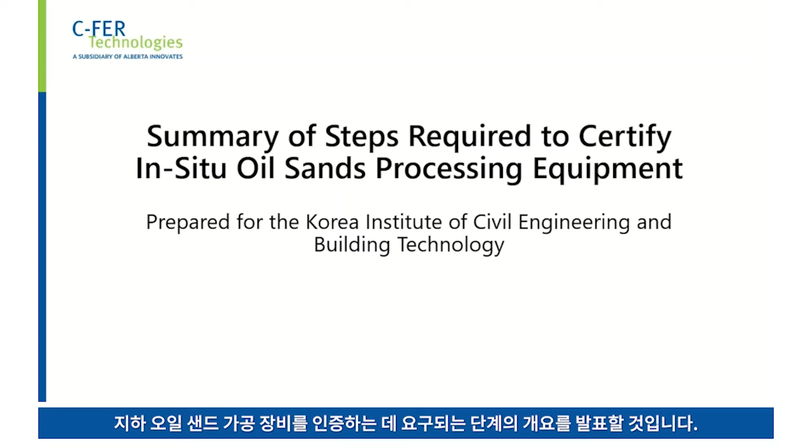I will be presenting on the summary of steps required to certify in-situ oil sands processing equipment, which was prepared for the Korea Institute of Civil Engineering and Building Technology.

First, I will provide an overview of the project, its objectives, and the Alberta Oil Sands. I will then highlight commercial in-situ recovery processes utilized, as well as the commercial steam generation equipment and its associated challenges. We will then explore emerging steam generation technologies, as well as the methods used to process and recycle produced water. We will then examine well pad separation equipment and equipment certification processes, followed by the project conclusion and question period.

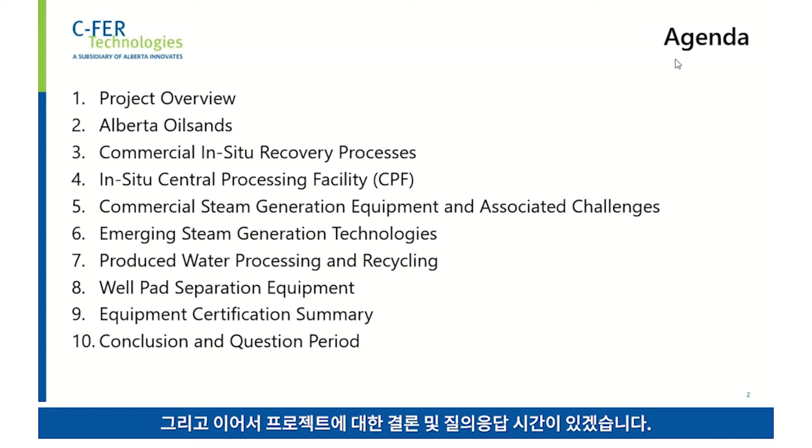Project overview. The focus of this project is to summarize the equipment used in steam generation, de-oiling, and well pad separation systems in Alberta. Note that manufacturers of steam generation and de-oiling technology are identified in the final report, but will not be discussed in this presentation.

Another focus of the project was the identification of current challenges facing commercial steam generation equipment and emerging technologies, as well as a review of Canadian equipment certification processes. The information presented is based on industry experts' experiences and publicly available sources.

The industry experts contacted were Falcon Energy Consulting Services, who provided a detailed listing of commercial and emerging central processing facility technologies, capital and operating expenditure data, regulatory application information, and relevant design standards. The second industry experts contacted was RAE Engineering and Inspection. These were subject matter experts with experience in the inspection and certification of equipment arriving or located in Canada.

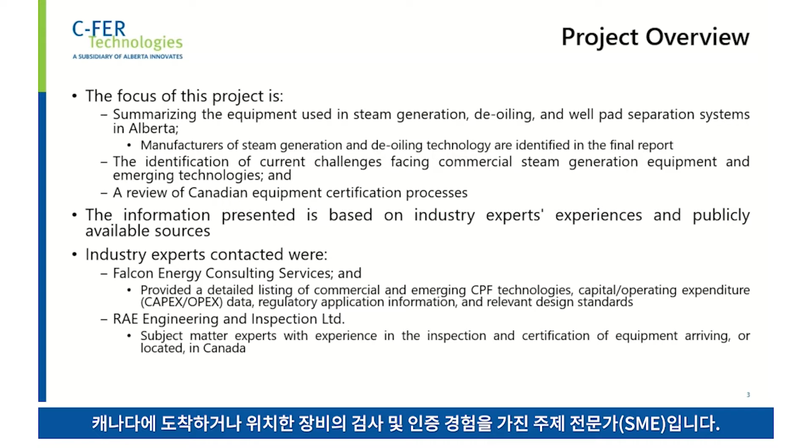Alberta Oil Sands constitute the third largest proven reserves in the world and are located in northern Alberta within the Athabasca, Cold Lake, and Peace River areas. 80% of the recoverable bitumen reserves in Alberta are too deep to be mined and processed from the surface, and as a result require the use of in-situ recovery methods using drilled wells.

The most common in-situ production methods involve the use of steam, which is pumped into the reservoir, which lowers the viscosity of the bitumen, increasing the mobility of the oil so it can be extracted. Oil sands production is overseen by the Alberta Energy Regulator, the AER, which is responsible for defining and legislating oil sands projects for the purposes of public and environmental safety, as well as taxation.

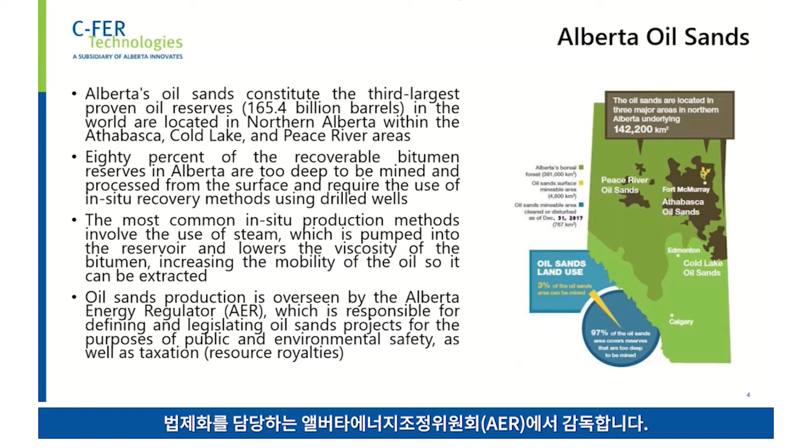Commercial in-situ technologies include steam flooding, cyclic steam stimulation, and steam-assisted gravity drainage. In steam flooding, steam is injected in a series of wells. A separate series of production wells decreases localized reservoir pressure, and the resulting differential pressure allows the heated bitumen to flow through the formation to the production well.

Cyclic steam stimulation is a single well process that involves 3 repeating phases of steam injection, a soaking time, and then production. In steam-assisted gravity drainage, or SAGD, 2 horizontal wells are drilled parallel to each other. Steam is injected in the well closer to surface, and heated oil mobilizes to the bottom producing well.

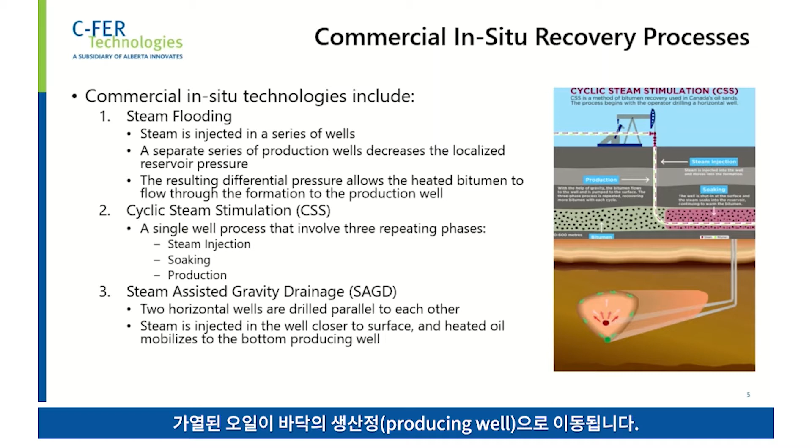In-situ oil recovery requires significant infrastructure to produce the steam, separate the produced oil from water, and then treat the produced water separated from the oil for the purposes of reuse in accordance with AER regulations. For example, operators must target a 90% recycling rate of injected water.

As a result of these significant infrastructure requirements, it has traditionally been uneconomical to build a separate processing facility at each well pad. Therefore, operators compile all necessary equipment in a central processing facility, as detailed in the figure to the right.

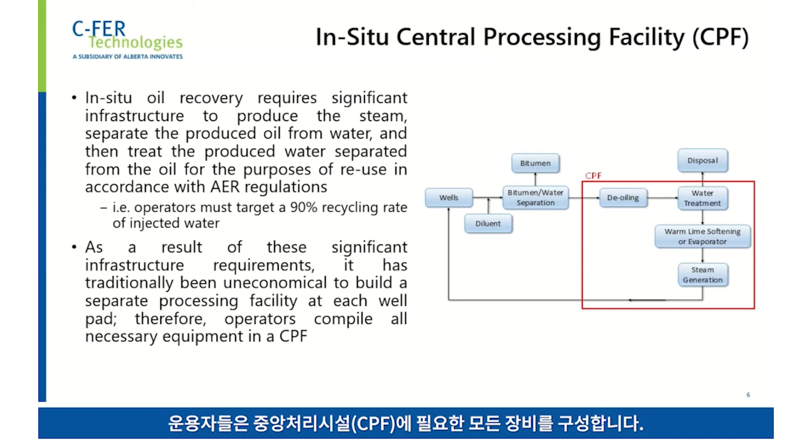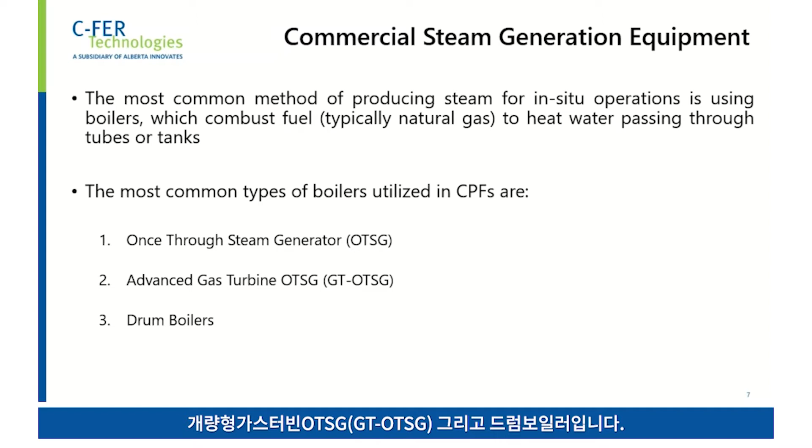The most common method of producing steam for in-situ operations is using boilers, which combust fuel, typically natural gas, to heat water passing through tubes or tanks. The most common types of boilers utilized in central processing facilities are once-through steam generators, advanced gas turbine once-through steam generators, and drum boilers.

Once-through steam generators are the most common boiler technology used for in-situ central processing facilities, with 170 to 200 installations currently in Western Canada. Their popularity is owing to their ability to utilize suboptimal feed water, which is achieved by operating with much lower heat flux rates than conventional boilers. The steam quality output is approximately 80%, and increasing steam quality would result in solids precipitation, leading to deposition in boiler tubes that requires increased maintenance to mitigate.

A steam separator is employed after the once-through steam generator to direct high-quality steam to the injector wells. A portion of the remaining liquid water is recycled back into the boiler, and the remaining water contains solid waste, and that is removed and disposed of as required.

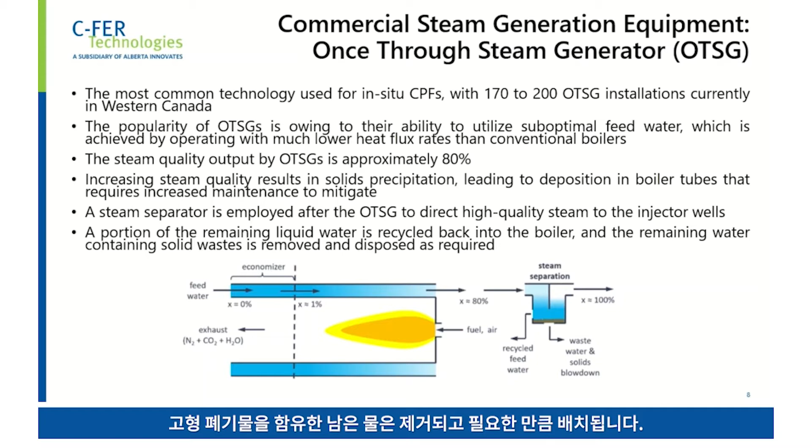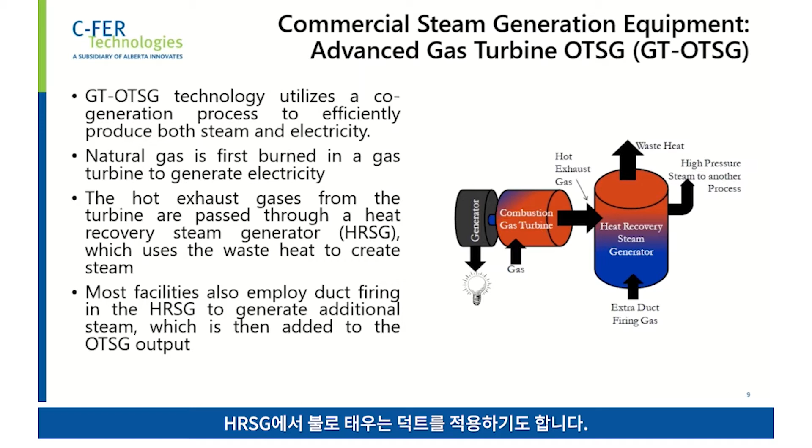In the drum boiler, water is heated within and between two connected drums, a mud drum located at the bottom and a steam drum located at the top. In the steam drum, the steam separates from the liquid water and is extracted, and in the mud drum, solids are allowed to separate from the water.

The drum boiler technology has the following advantages compared to once-through steam generators: it provides high-quality steam, eliminating the need for a steam separator and the need to recycle feed water. It also has a high heat flux to the boiler walls, allowing for a smaller overall boiler footprint. As well, the mud drum allows solids to separate, which reduces the volume of wastewater.

The main disadvantage of this technology is the requirement for high-quality feed water to prevent rapid deposition of solids in the mud drum. A drum boiler is typically installed with an expensive evaporator water treatment system, which will be discussed later. Another disadvantage is that a drum boiler cannot be cleaned with conventional, less expensive once-through steam generator methods, such as pigging. It must be cleaned by personnel accessing the drum.

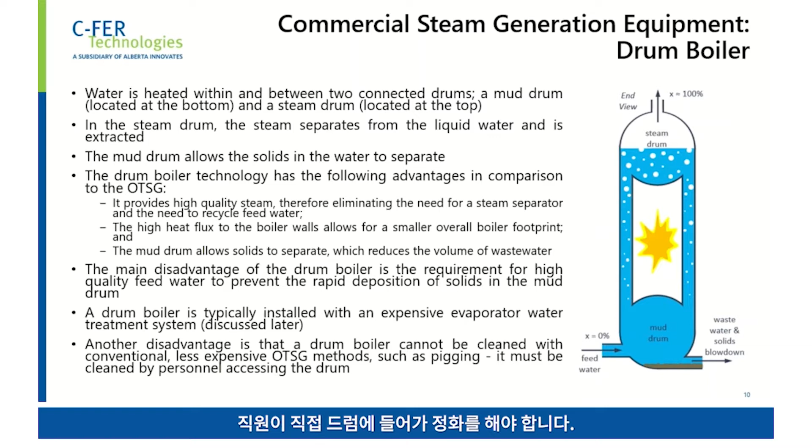Challenges of commercial steam generation equipment include, primarily, sourcing and treating feed water for the boilers. A large portion of feed water comes from recycled, treated, and produced water, in which the total dissolved solids content increases due to continual recycling.

Feed water is often augmented with makeup water drawn from saline aquifers, or to a lesser extent surface waters such as rivers, which can vary significantly in total dissolved solids content based on source or time of year. For example, rivers have higher total dissolved solids contents in spring when water levels are higher.

Another issue facing steam generation technology is the fouling and scaling of boilers and tubes by unremoved oil, hardness, silica, and other materials, which results in lower efficiencies and can cause damage to the equipment by overheating the tubes. As a result of fouling, regular cleaning of boiler tubes is required, leading to downtime and additional costs.

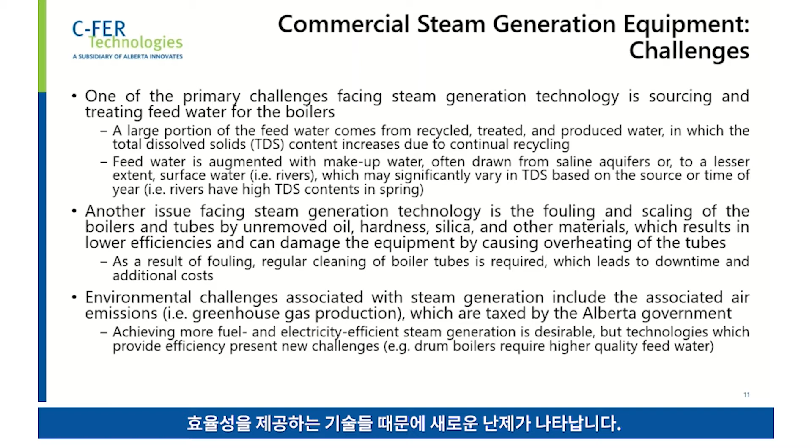Environmental challenges associated with steam generation include associated air emissions, such as greenhouse gas production, which are taxed by the government of Alberta. Achieving more fuel-efficient and electricity-efficient steam generation is desirable, but technologies which provide efficiencies present new challenges, such as drum boilers requiring higher quality feed water.

Emerging steam generation technologies which aim to address the commercial challenges listed above include dual-loop systems, direct contact steam generators (air-fired), direct contact steam generators (oxygen-fired), as well as flash steam generators, plasma steam generators, and forced circulation oil sands steam generators.

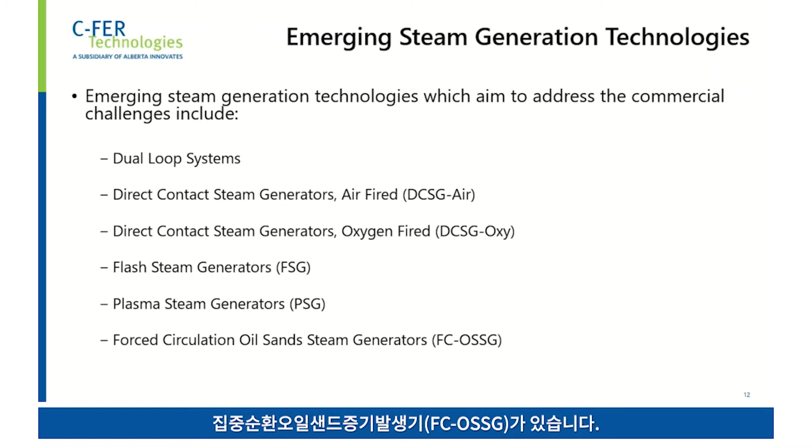In a dual-loop system, a heat exchanger is utilized to achieve boiling of the feed water. Fluid in a primary closed loop is heated to high temperatures via combustion and is heat exchanged with the feed water under moderate heat flux conditions to generate steam for injection. Fouling rates are greatly reduced as less steam is generated compared to a boiler.

The primary advantage is the potential to use produced water directly from a free water knockout vessel, which is used to separate produced oil, water, and gas, bypassing the need for extensive additional water treatment during recycling. The main disadvantage of a dual-loop system is that it requires approximately double the heat transfer area, resulting in a larger footprint than a traditional boiler.

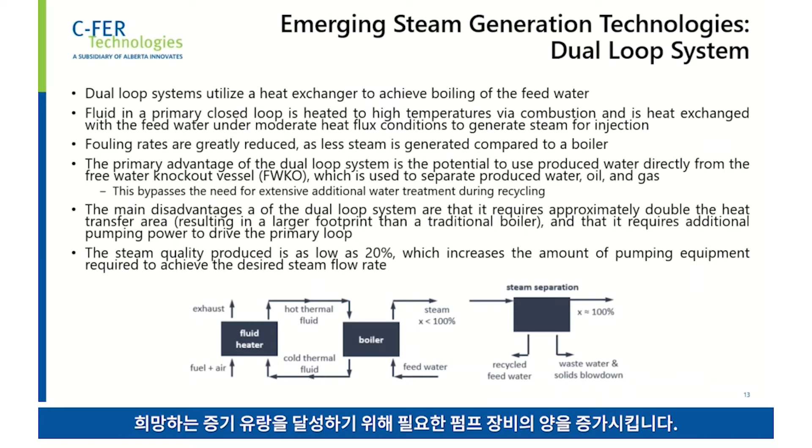It requires additional pumping power to drive the primary loop, and the steam quality produced is as low as 20%, which increases the amount of pumping equipment required to achieve the desired steam flow rate.

In a direct contact steam generator, air-fired, feed water is injected directly into a combustion chamber that uses a fuel-air mixture compressed to the produced steam pressure. The process stream leaving the combustion chamber contains steam generated from the feed water, as well as steam generated from the combustion process and non-condensable gases.

Unlike conventional boiler technologies, these systems do not transfer heat through boiler walls or tubes, which significantly reduces surface fouling. This allows the use of low-quality feed water, resulting in cost-effective feed water treatment.

Steam quality can be increased by operating at superheated conditions, which maximizes steam quality and allows solids in the feed water to leave as dry solids, reducing wastewater handling but introducing a solid waste stream that must be disposed of. The requirement to compress the air and fuel up to system pressure results in additional equipment and expenses, such as a compressor.

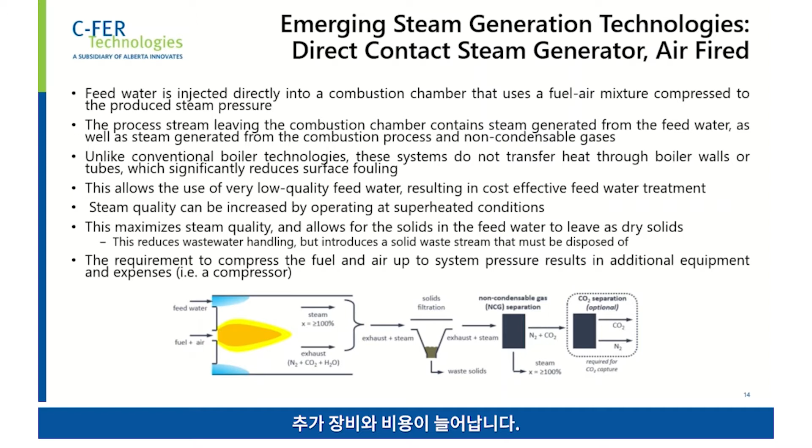In the direct contact steam generator, oxygen-fired variant, pure oxygen is utilized in the combustion chamber as opposed to compressed air, and this oxygen is either in compressed gaseous form, requiring upstream air separation, or from a liquid supply. The use of pure oxygen results in more complete combustion, resulting in higher temperatures and steam quality. For example, supercritical steam can be achieved. The only major constituents in the products leaving the combustion chamber are steam and CO2. As a result, these systems are well suited for carbon dioxide capture.

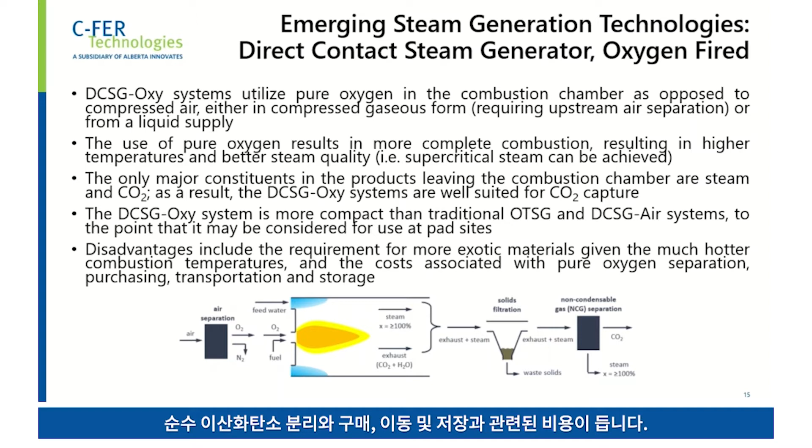These systems are more compact than traditional once-through-steam generators and direct contact steam generator air systems, to the point that it may be considered for use at pad sites. Disadvantages include the requirements for more exotic materials given the hotter combustion temperatures, and the costs associated with pure oxygen separation, purchasing, transportation, and storage.

Flash steam generator technology utilizes a combination of heating and pressure drop to create steam. Feed water is first highly pressurized and then heated to a few degrees below boiling point, the saturation temperature, through a series of heat exchangers and an economizer. Steam is then generated by depressurizing or flashing the heated water through an opening in the flash vessel.

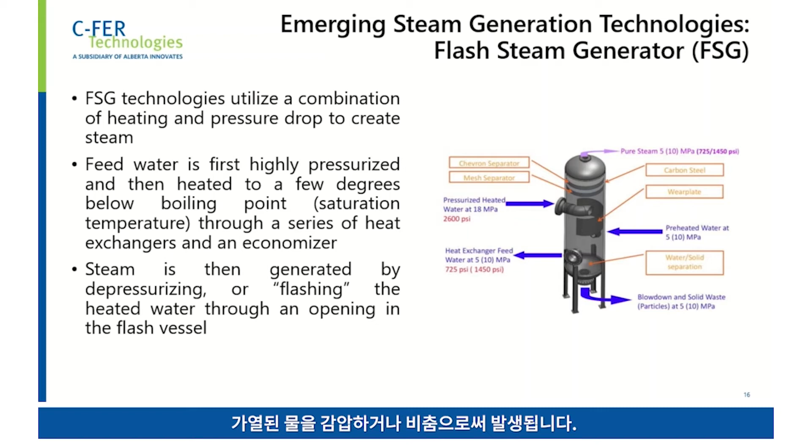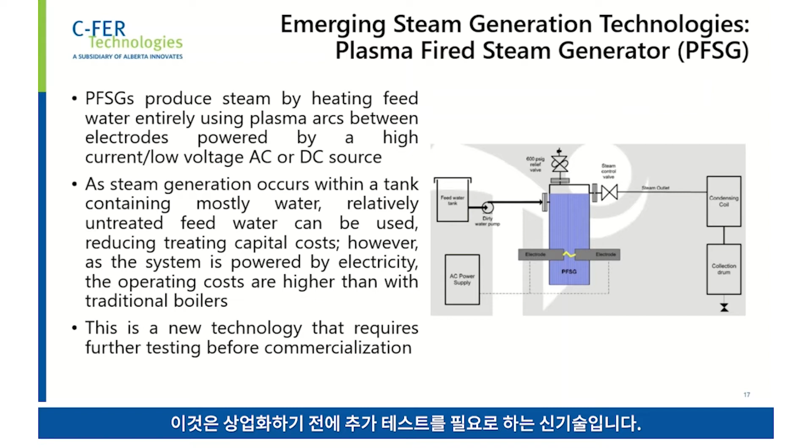Plasma-fired steam generators produce steam by heating feed water entirely using plasma arcs between electrodes powered by a high current, low voltage, alternating current, or direct current source. As steam generation occurs within a tank containing mostly water, relatively untreated feed water can be used, reducing treating capital costs. However, as the system is powered by electricity, the operating costs are higher than with traditional boilers. This is a new technology that requires further testing before commercialization.

In forced circulation oil sands steam generators, it utilizes a hybrid design that operates like a drum boiler, but can be cleaned using conventional once-through-steam generation techniques such as pigging. Steam and water are separated in a steam drum, with heating occurring in evaporator coils that are placed in a separate furnace. Water is circulated from the steam drum to the evaporator coils, where approximately 20% of the water is converted to steam during normal operation. The steam and water mixture returns to the drum and are then separated, with the remaining water recirculated.

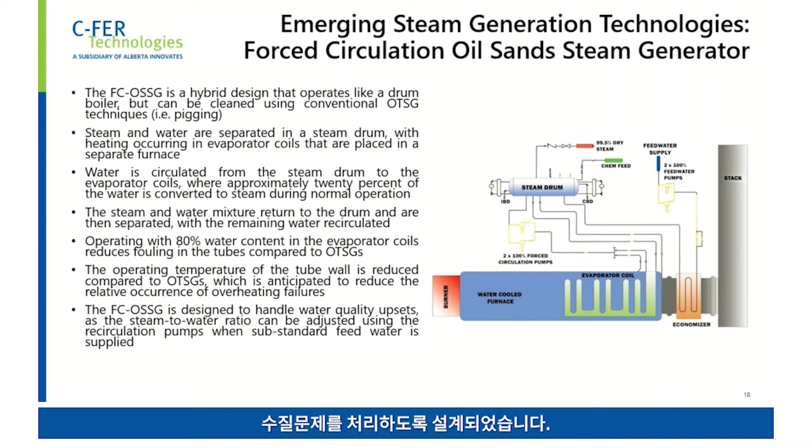Operating with 80% water content in the evaporator coils reduces fouling in the tubes compared to once-through steam generators. The operating temperature of the tube wall is reduced, which is anticipated to reduce the relative occurrence of overheating failures. The forced circulation oil sands steam generator is designed to handle water quality upsets, as the steam to water ratio can be adjusted using the recirculation pumps when substandard feed water is supplied.

I'll now give an overview of produced water processing and recycling. Water that is produced with oil typically consists of free water, suspended water and solids, water-in-oil emulsions, and/or oil-in-water reverse emulsions.

Water treatment begins at the well pad site with sand and solids removal. Typically, the produced water is a combination of slightly saline formation water and condensed steam that is kept in an emulsion, or at least a high water cut, to facilitate pipeline transportation from well pads to the central processing facility. Water compositions vary from operation to operation, depending on the source of the makeup water, treatment processes used, and reservoir mineralogy or geochemistry. Water management plans aim at minimizing the amount of additional makeup and disposal water through treatment and reutilization to meet regulations and mitigate potential supply scarcities.

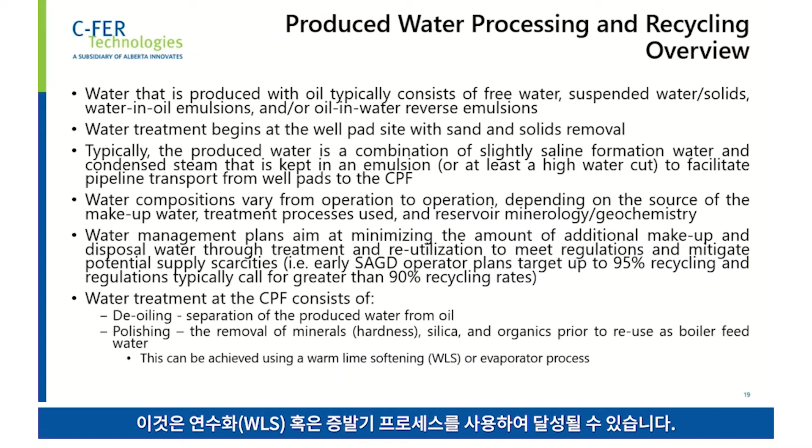For example, early SAGD operator plans target up to 95% recycling, and regulations typically call for greater than 90% recycling rates. Water treatment at the central processing facility consists of de-oiling, which is the separation of the produced water from oil, and polishing, the removal of minerals, also known as hardness, silica, and organics prior to reuse as boiler feed water. This can be achieved using a warm lime softening or evaporator process.

In the de-oiling stage, the first step in bulk oil water separation occurs in the primary production separation systems, which typically consists of a free water knockout vessel, a 2 or 3 phase gravity separator. Free oil and water are mostly separated at this stage. However, oil-in-water emulsions and suspended solids are too small to be effectively separated by the gravity process utilized by free water knockout vessels.

A second oil removal unit process is installed, which includes a skim tank, a gravity separation vessel, an induced gas flotation process, in which injected gas bubbles adhere to suspended matters and float to the surface, and oil removal filters. The de-oiled water is then stored in a produced water tank.

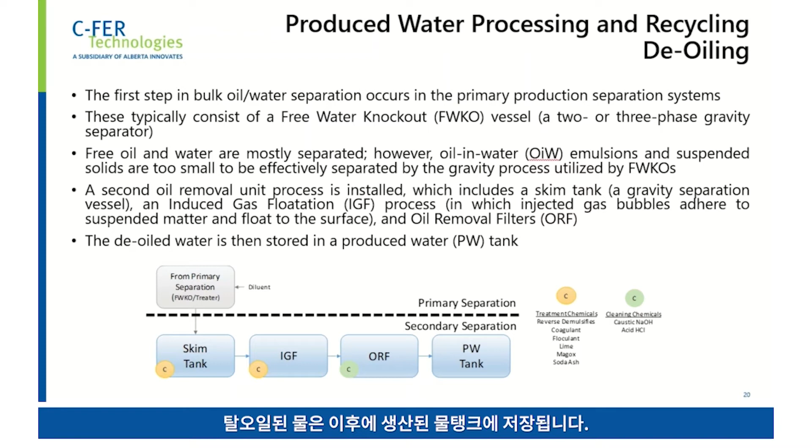The commonly employed treatment system to remove the contaminants remaining after secondary separation is the warm lime softening process. This involves pretreatment of the water with heated lime to reduce hardness and alkalinity, and magnesium oxide to remove silica. The final step involves a series of weak acid cation exchangers to remove calcium, magnesium, iron, and traces of oil.

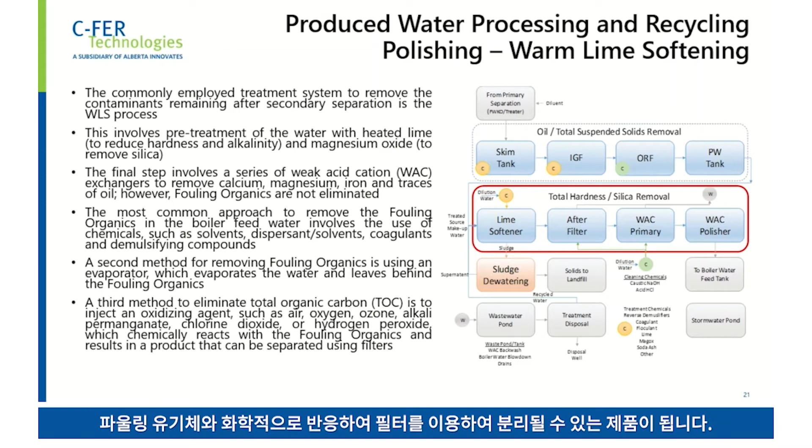However, fouling organics are not eliminated at that stage. The most common approach to remove these fouling organics in the boiler feed water involves the use of chemicals such as solvents, dispersants, coagulants, and de-emulsifying compounds. A second method is using an evaporator, which evaporates the water and leaves behind the fouling organics. A third method to eliminate total organic carbon is to inject an oxidizing agent such as air, oxygen, ozone, alkali permanganate, chlorine dioxide, or hydrogen peroxide, which chemically reacts with the fouling organics and results in a product that can be separated using filters.

Another process to prepare boiler feed water is using an evaporator, which is often installed upstream of a drum boiler to meet this type of boiler's more stringent feed water quality specifications. First, the pH of the produced water is controlled to prevent excessive acidity, which could damage equipment, and then the water is de-aerated to minimize corrosion. The water is then fed into a vertical tube, falling film type evaporator, which allows for the extraction of distilled water vapor that is clear of impurities. The impurities fall into liquid water at the base of the evaporator and are disposed of.

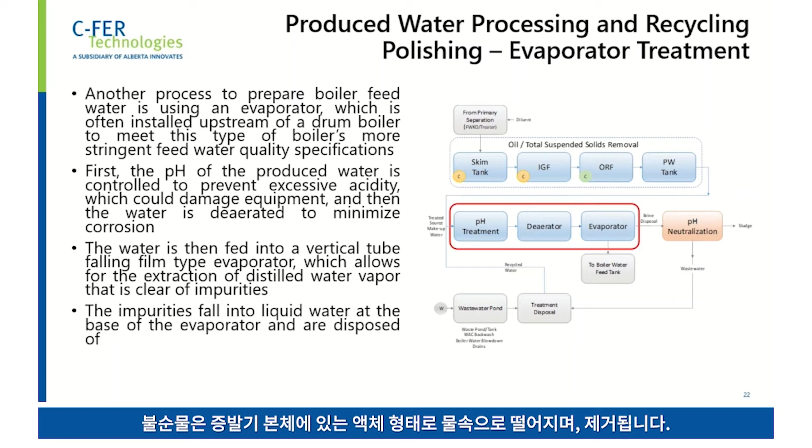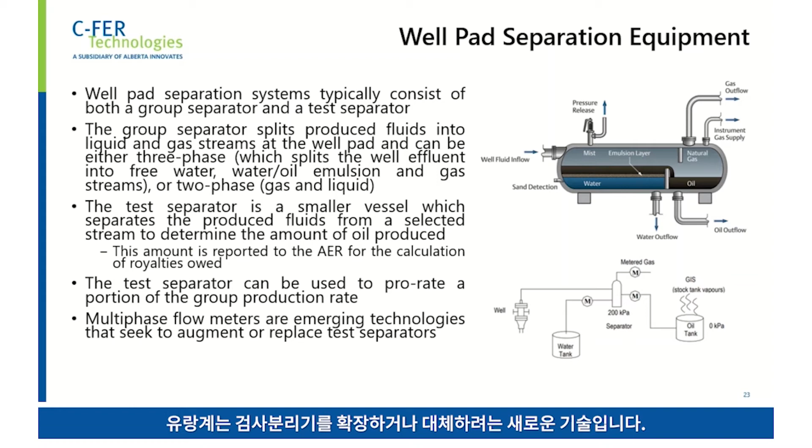Well pad separation systems typically consist of both a group separator and a test separator. The group separator splits produced fluids into liquid and gas streams at the well pad and can be either 3-phase, which splits the well effluent into free water, water-oil emulsion, and gas streams, or 2-phase, just gas and liquid. The test separator is a smaller vessel which separates the produced fluids from a selected stream to determine the amount of oil produced, and this amount is reported to the Alberta Energy Regulator for the calculation of royalties owed. The test separator can be used to prorate a portion of the group production rate, and multi-phase flow meters are emerging technologies that seek to augment or replace test separators.

We will now move on to equipment certification summary.

In Canada, all products must be approved for use before being put into service. The Standards Council of Canada, the SCC, accredits several agencies to distribute certification labels for products. All agencies accredited by the SCC follow strict International Standard Organization standards in terms of quality, conflict of interest, and information security and management. These agencies are defined as certification bodies.

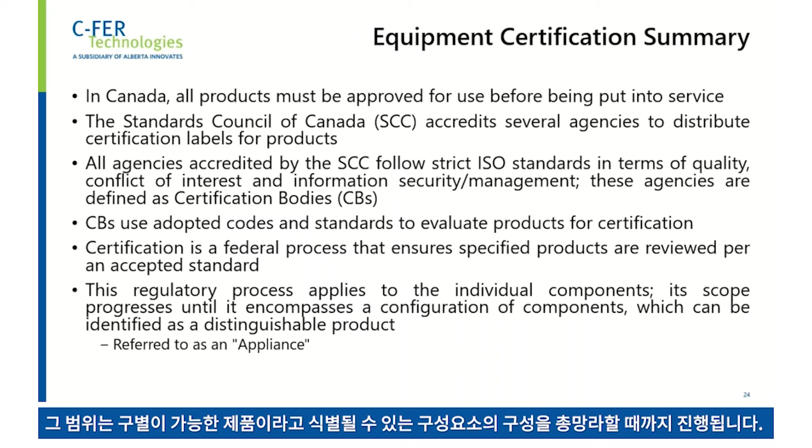Certification bodies use adopted codes and standards to evaluate products for certification. Certification is a federal process that ensures specified products are reviewed per an accepted standard. This regulatory process applies to the individual components. Its scope progresses until it encompasses a configuration of components, which can be identified as a distinguishable product referred to as an appliance.

Certification includes all aspects of the appliance, such as the electrical, documentation, fuel, pressure rating, and bilingual safety labeling. Any appliance or component that enters Canada bearing the marking of one of the accredited certification bodies is permitted for use in any jurisdiction in Canada. Note that certification bodies only attest to the safety of the product, not its function, unless that function is defined in the standard to which it is certified.

The route to certification depends on the number of units produced, whether it is greater or less than 300, and the appliance function. As a result, there are three methods to obtain certification of an appliance: standard certification, special certification, and special inspection.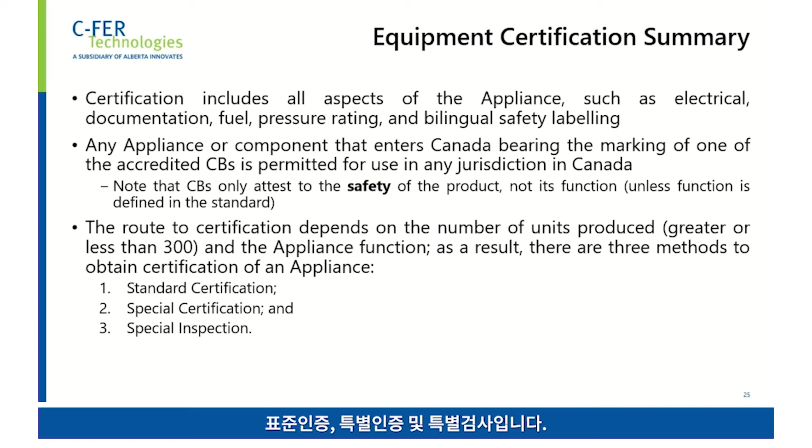In standard certification, certification bodies operate at the point of manufacture. Certification bodies accredit original equipment manufacturers' production facilities for production runs exceeding 300 units yearly. This provides the original equipment manufacturer with the ability to affix their own compliance labeling showing that it is certified.

In special certification, this is applied when some appliances lack a standard to which they can be certified or are not produced in the numbers required, 300, to warrant the accreditation of the original equipment manufacturer. In these cases, certification bodies have the option to perform special inspections on those appliances. These inspections are comprised of several safety standards pertaining to the appliance to assure it meets the minimum level of safety requirements. The appliance receives custom labeling denoting the various metrics used to approve the product. Special certification can be performed at the point of manufacture or the destination.

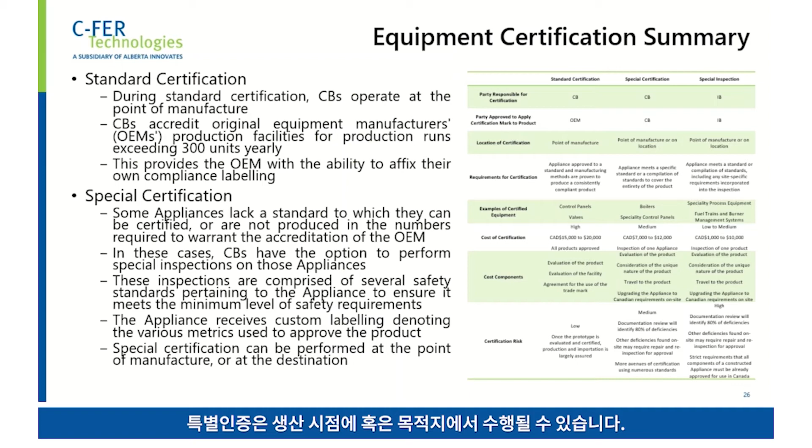In special inspection, the third option for the certification of appliances in Canada, this is through Standards Council of Canada accredited organizations known as inspection bodies, which can perform special inspections of certain appliances on site. Dependent on their accreditation, inspection bodies can apply one specialized code for which no other standards applies, or inspect appliances produced in limited runs, which is defined as less than 300 units per year.

Inspection bodies can review these appliances and components with an extremely limited scope. Little deviation from accredited standards is permitted in these cases. Inspection bodies do not allow for appliances comprised of non-Canadian certified components or for deviation from the certified purpose of those components. Inspection bodies operate under the direction of the local authority having jurisdiction, which is a provincial representative often referred to as the chief.

In the province of Alberta, the Alberta Safety Codes Act is the overarching document that dictates how appliances are installed and operated. It delegates power of authority to several chiefs depending on the discipline, and there are three primary authorities with jurisdiction: Alberta Municipal Affairs, responsible for plumbing, sewer, electrical, and fuel systems; the Alberta Boiler Safety Association, which administers Alberta's pressure equipment safety programs; and the Alberta Energy Regulator, responsible for public safety, interest, and the environment.

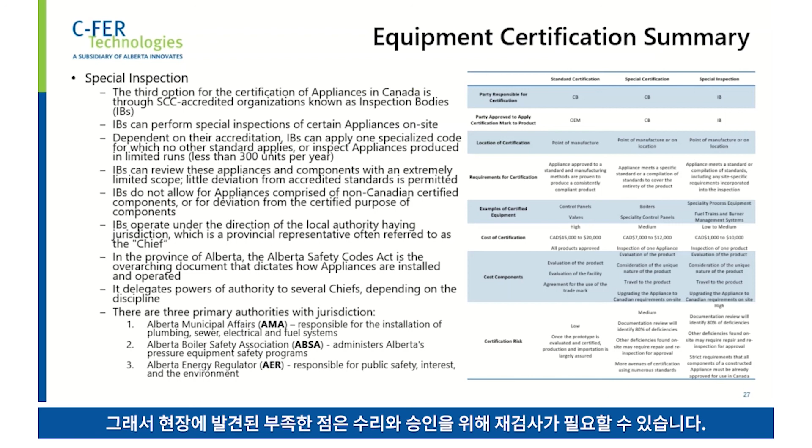In conclusion, the goal of this project was summarizing the equipment used in steam generation, de-oiling, and well pad separation systems in Alberta, as well as manufacturers of steam generation and de-oiling technology, examining current challenges facing commercial steam generation equipment and emerging technologies, as well as providing a review of Canadian equipment certification processes. Additional topics for further evaluation include review of custom designs against applicable regulations, codes, and standards, and an in-depth evaluation of an appliance for de-oiling, water treatment, and/or steam generation, with a comparison to existing technologies used by oil and gas operating companies, for example by examining technology readiness levels and capital expenditure costs.